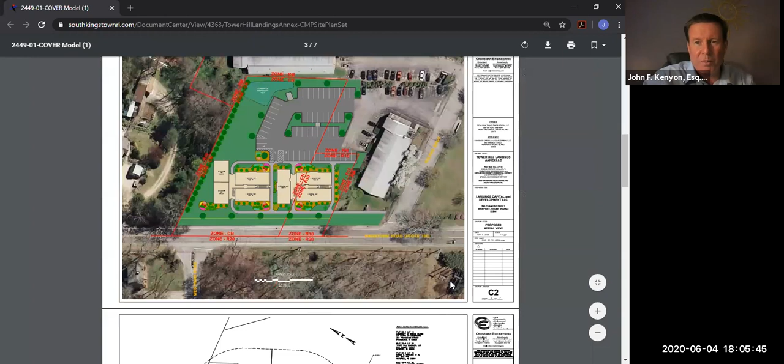There were previously 2 residential dwelling units located at the rear of the property, and there was a restaurant in the front, which was most recently Kachina Twist, and long before that it was Iggy's. It was most recently approved as a Dan's restaurant, which this commission may have reviewed a few years ago. That was never built, and the lot is now vacant.

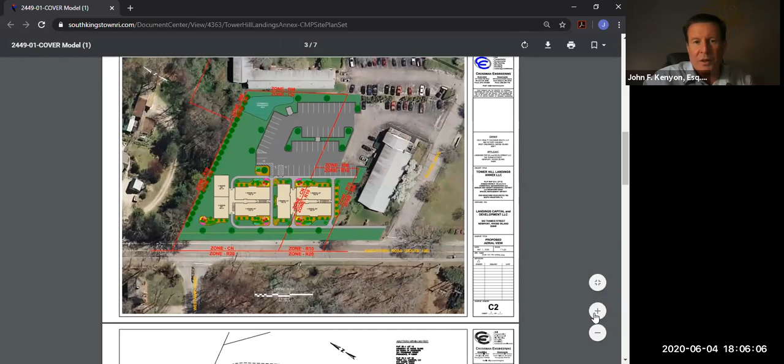The applicant operates the multifamily residential complex adjacent to the property. They're proposing 11 dwelling units in 2 buildings located at the front of this lot. The units will be serviced by public water and sewer. The project meets the density and dimensional requirements under the zoning ordinance. There'll be 9 4-bedroom units and 2 2-bedroom units.

One of the 4-bedroom units and one of the 2-bedroom units will be designated as affordable in compliance with the town's inclusionary zoning requirements. The approval for Dan's included a large curb cut out onto Kingstown Road. The applicant's proposing no new curb cut and will access the property over the existing curb cut on the adjacent property.

Since the project contains 2 residential buildings, it's considered a multi-household land development project, which has a couple of requirements we'll need to request waivers from. The first is a 100-foot setback from Kingstown Road. If you're familiar with the Kingstown Road Special Management District, the thought behind that was to move the buildings closer to the road and have the parking behind the buildings. So that requirement directly conflicts with the Kingstown Road design element, which is why we're requesting a waiver from it. The second requirement is that buildings be separated by 50 feet, and we're proposing 10 feet of separation.

We're here tonight as we filed an application for master plan approval and have a hearing scheduled for later this month in front of the planning board. At this time, the plans are conceptual. If they're approved, the applicant will move forward with preparing more detailed plans, obtain any state approvals, and then come back to the planning board for preliminary plan review.

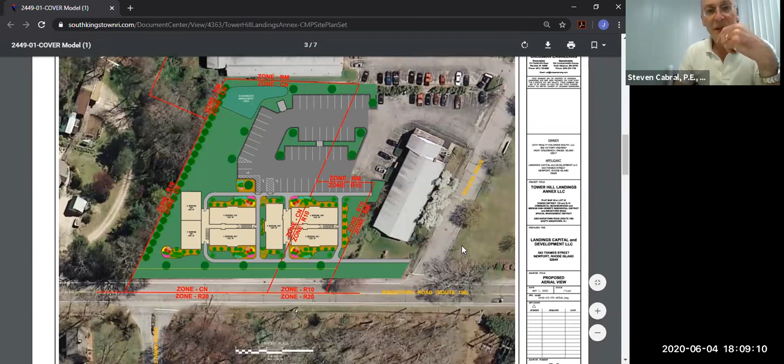So Steve, if you want to go forward and go over existing and then proposed plans. Oh, sure. Jay, could we go back to the existing aerial photo? Yep, thank you. I'm Steve Cabral with Crossman Engineering in Warwick.

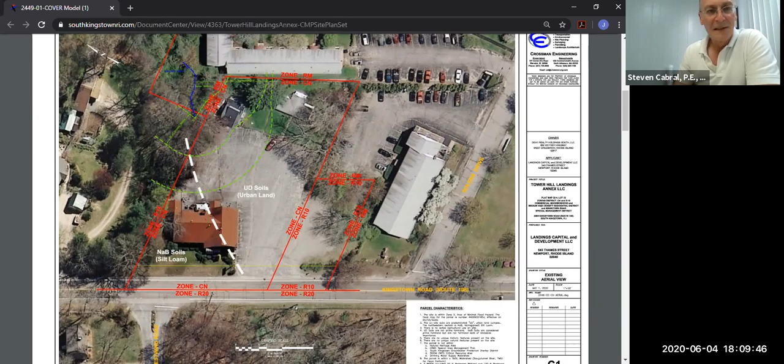As John indicated, we'd already gone through the state and local process to obtain permits for the Dan's Place, and I believe that was in 2017. Because of that, we have quite a bit of information about the site, including exactly where the existing wetlands are, since they've all been approved or verified by DEM. In the upper left corner on the adjacent lot, this dashed yellow line is the documented edge of the existing vegetated wetland. That wetland has a 50-foot perimeter that extends into the site, and in the middle of that wetland there's a small channel, which we considered and DEM agreed is an intermittent stream, so we added a 100-foot riverbank to that.

But as you can see, under existing conditions, the site's already fully developed. I suspect a lot of people come to you and say their project's going to have no impact on the environment, but with this project, there's no doubt there's going to be a significant benefit to the wetland, and I'll briefly explain why.

Currently, the elevation along Kingstown Road to the back drops by about 8 feet, so all of the pavement at the existing restaurant just flows unmitigated into this little channel. During a rainstorm, most of the flow flows to the back, washes down this eroded channel, and then there's another channel that flows right along the back property line into the wetland.

Under current conditions, there's no recharge that occurs and no water quality measures that exist. Everything is left untreated and discharges into the wetland. I should point out that we are within the watershed of the Saugatucket River, which has a TMDL for bacteria, fecal coliform, so as we develop the drainage design, we'll make sure to address that specific pollutant of concern. And what we're proposing—Jay, could we go to the next aerial?

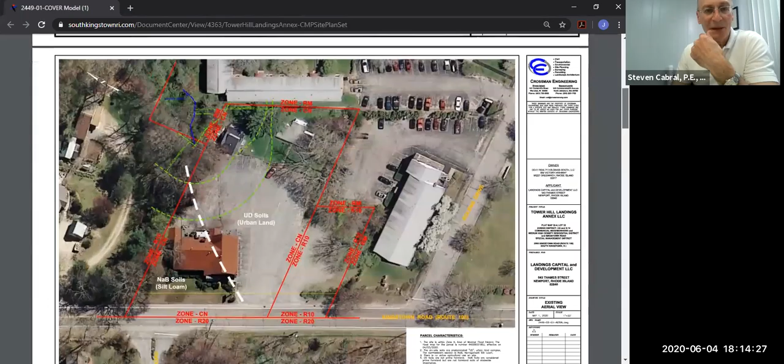Was not quite as extensive when it comes to water quality improvements. For Dan's Place, we utilized standard pavement, and we had an underground storage system that discharged into a sand filter. But we feel with the addition of porous pavement, in addition to the sand filter, we'll be improving the conditions above and beyond what DEM already permitted for Dan's Place.

Now, because this is only the conceptual master plan stage, we really don't have the nitty-gritty details for me to show you, but that's a very brief overview of the concept.

Steve, it's John Kenyon. Can you also just explain the access to the property, how Dan's Place was going to be accessed, and then how the applicant's proposing it now?

Yes, I will. For Dan's Place, the main access was going to be pretty much, if you could see where my cursor is moving, right in the middle of the parcel. There was going to be an in and an out, so all of the traffic was going to be essentially opposite. I believe there's West Wind Estates, West Wind Circle, so there was going to be an in and an out offset from West Wind.

And with the new proposal, as John mentioned, we're actually proposing a new curb line right along Kingstown Road. The reason for the curb line is to help keep the stormwater runoff from eroding the new lawn and directing it to an existing state DOT drain line. Our new access is going to be through the existing apartment complex, right through here.

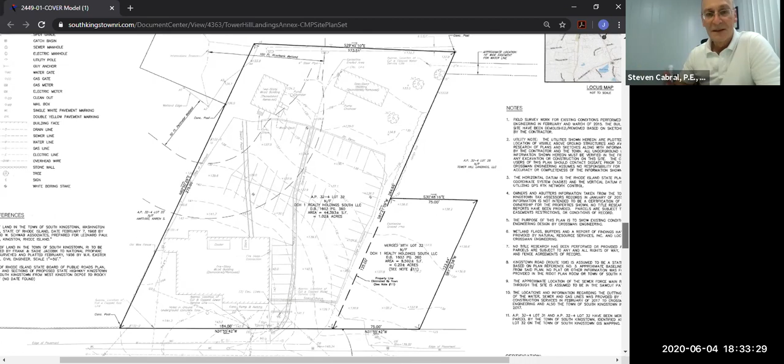So we were proposing to put curbing to prevent the gutter flow from eroding the new lawn. Now, in very extreme flooding cases, because there's a low point in front of the property, if the catch basin is clogged during an extreme event, water has been known to flow through Dan's place, but at that point there'd be quite a puddle in Kingstown Road, and it would go rushing down into the wetland.

That's not the intended discharge of the state DOT drain. But we also want to be sensitive that when we put the curb, we do want to allow some type of escape for the water during a severe occasion, say if the DOT drain was clogged. Currently in the pavement there's a little gutter right along the front of the old restaurant that keeps the water during regular storm events in Kingstown Road.

So have you spoken with DOT about your plans to put in a curb? We have not submitted any applications to DOT for this application.

They did approve Dan's Place, which did have, I believe, a berm in the front, except at the new driveway location. So the concept with Dan's Place that was approved was similar, except I believe we went with the less expensive berm as opposed to the curb.

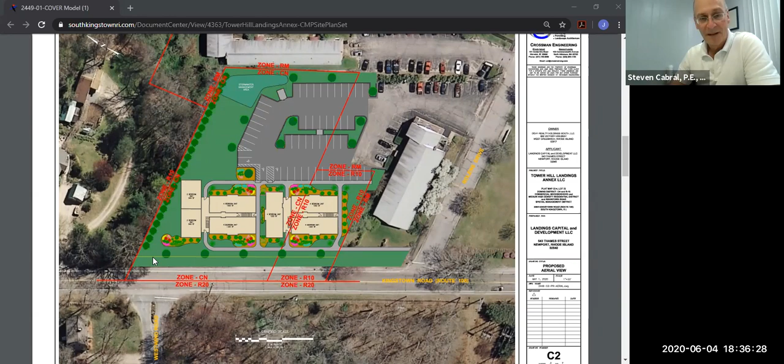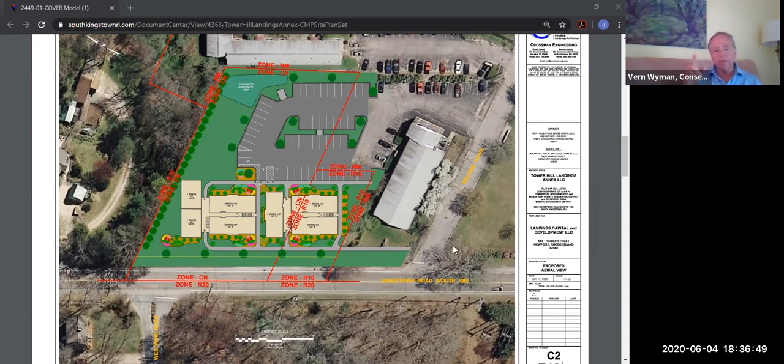Does anybody else have any other comments or questions? Just one clarification. I know there appeared on some of the drawings an indication of a right-of-way and a water service coming from the south into the eastern end of the property.

But I believe the Kingston line is in this 108 location. So is that the old United Water connection, or is that one of the routes that water will take, or one of Kingston Water's lines?

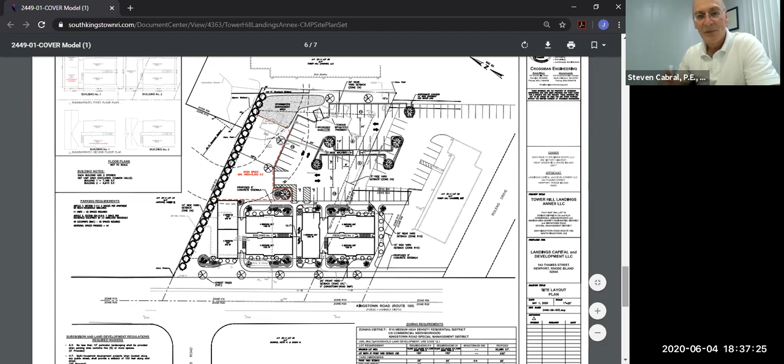Yep, that's a good question. The property is right on the dividing line between the Suez Water District and the Kingston Water District. Before the buildings were demolished, there was a domestic service line from the apartment complex that served the homes, yet the restaurant actually had its fire service from Kingstown Water.

We did have discussions. First we went to Kingston Water. Kingston told us they believe Suez Water wanted to serve the site. As Suez realized that because of the elevations of the site they could not provide adequate fire service, we went back to Kingston Water, and Kingston agreed to provide water for fire and domestic. So we will no longer need that easement in the back. I see.

This is an advisory opinion to the planning board, just whether we favor the project or not. Lorraine, as you had some concerns that I'd like to see articulated in our proposal, could you make the draft motion?

Sure, Lorraine, if I can interject. I think it'd be appropriate to make sure if that's the extent of comments from the board. If anybody else, I thought Chris might have started. I have one quick question. I think John. Thank you.

I apologize, I think John had mentioned that there was a waiver or two waivers required, and one of them is a setback from Kingstown Road. I was just wondering how much of a waiver are you asking for?

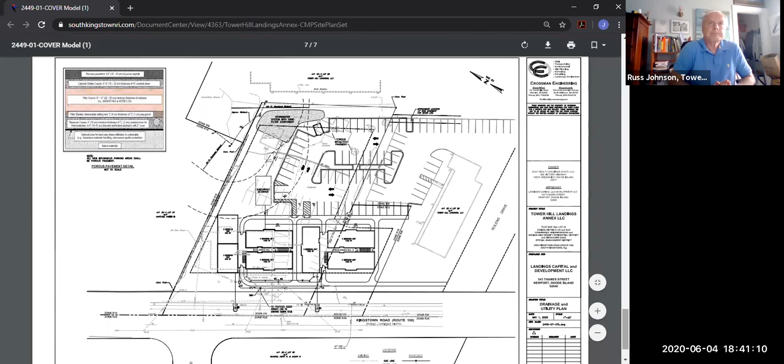So one of my concerns is that because this is within the perimeter wetland and riverbank area, if construction is occurring during the wet season, that seems like it could cause a lot more sedimentation in the stream. Is that something you can avoid, construction during the wet season?

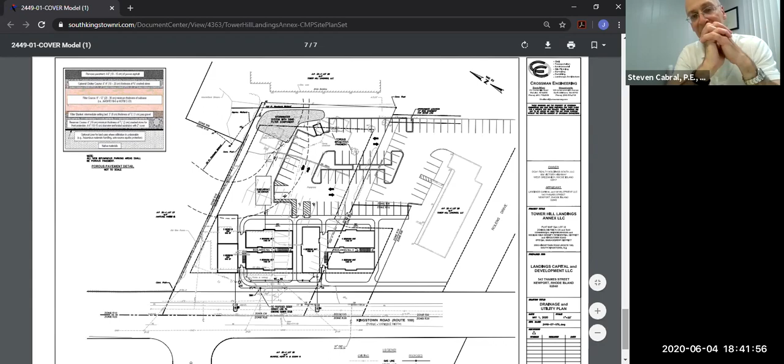What we can do is make sure that, as you know, we have to prepare a sediment and soil erosion control plan. And the thought we had is that we could enhance the soil erosion controls along the perimeter wetland as a safety precaution. We could also grade the site early on in a manner that during a normal rain event, the flow would actually drain to the south, away from the wetland, into a sediment basin. So we do believe there are measures we can take to minimize siltation.

What we've actually seen is we tend to get more siltation sometimes during summer events when you get heavy thunderstorms and the rainfall intensity is very high. During the wet season, when the precipitation intensity tends to be a little less, sometimes it's actually easier to control. So personally, I'm not worried about doing the work during the wet season, knowing that the intensity is typically less.

Yeah, it's just that all the bare soil should be covered, vegetated, or otherwise covered after mid-October. Isn't that right? If the work stops for the winter season, but if you continue to work, then everything has to be directed towards a sediment basin. So what we would do is, outside of the sand filter, we would have a sediment basin, so the water would first flow to the basin to help remove the silt. But I do agree that if construction were to halt for the winter shutdown season, at that time the soil would have to be covered in some manner.

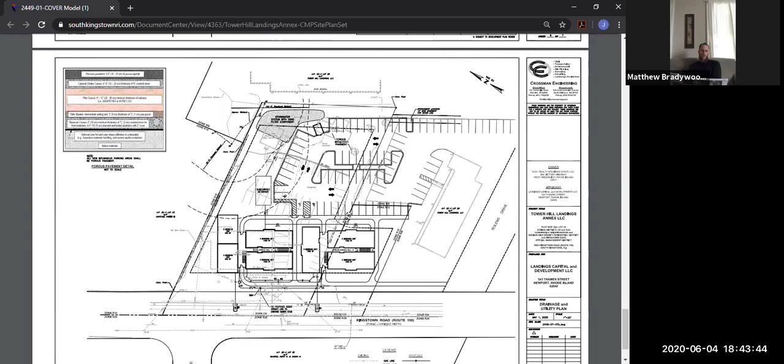Okay, seems like the soil erosion and sediment control plan would have to be thoroughly thought out and regularly inspected and enforced. Yes, it certainly should, and we're certainly more than happy to share it with you all.

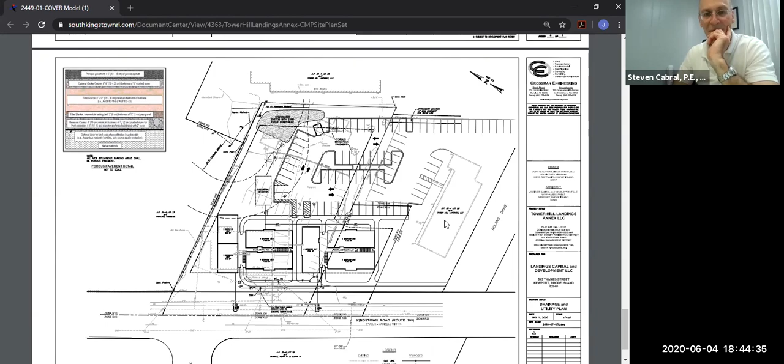Any other comments or questions? Just one minor item. I noticed there's an area reserved at the back of the site for dumpster and recycling facilities. I presume that's a solid slab there, and would some retention of any runoff that might occur be advisable given its proximity to the collection point and the perimeter wetland? Yeah, that's a good point. We did intend a concrete slab, but we could certainly put a 6-inch curbing around it. That certainly would be beneficial. That's great, all right, good idea.

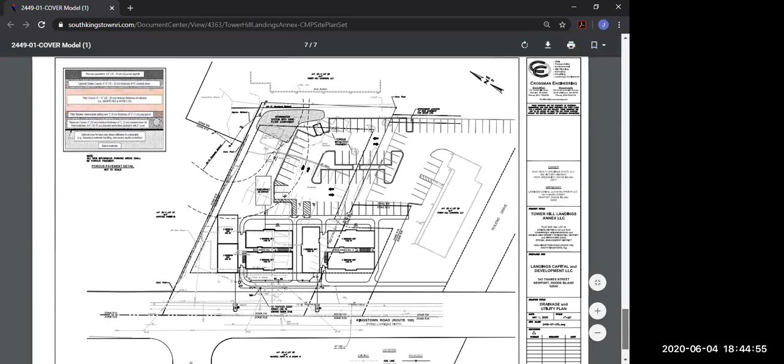Anything else before we proceed to a motion? Lorraine, do you want to make that motion? Sure. Including what we just talked about, by the way. Yes, right. First of all,

We recognize that the shared access from Rollins Drive and the reduced frontage from the buildings and closer siting of the buildings is one way to help reduce impervious cover, so we recommend those design methods. We are a bit concerned about the depth to water table and the filling that's going to occur, but without more information, we would have to rely on DEM to ensure that all protective measures are taken. The curbing along Route 108 seems to be one way to reduce runoff crossing into the property and down gradient towards the wetland.

We're pleased to see the use of permeable pavements. My only concern is that if for some reason DEM does not approve permeable pavements due to water table depth or any other condition, the applicant would have to come back to us with other types of stormwater management measures that could be accommodated on this site to reduce runoff to the same extent possible.

Do we want to include language requiring a maintenance contract? Most definitely. So in terms of the installation and design of the asphalt or permeable pavement parking lot, the plans should be reviewed by an outside expert, and there should be an on-site inspector when the permeable parking lot is installed, to ensure the asphalt mix is correct and the installation is correct, and that a maintenance contract afterwards be developed.

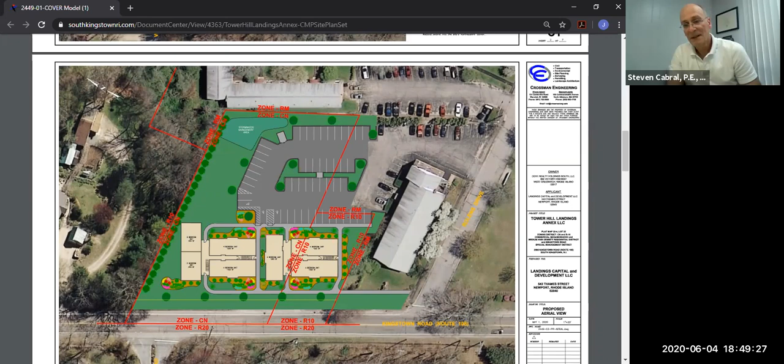Jay, is there any update from staff on planning department activities? The only information I have is that the planning director has announced she will be leaving at the end of the month. Kayla? Yep.

Where's she going? She is returning home to Vermont for personal reasons. They have a family estate, and her husband's got a job up there, so she's going home to facilitate the management of the family compound or land that they have. That's too bad, yeah, that's too bad.

Our next meeting date is going to be July 7th. Jay, if anybody has any agenda items to propose for that meeting, what is that deadline? The 29th or the 30th of June? Give me one second. Yeah, I would say the 29th or 30th. Okay, and you and I will be in touch before then.